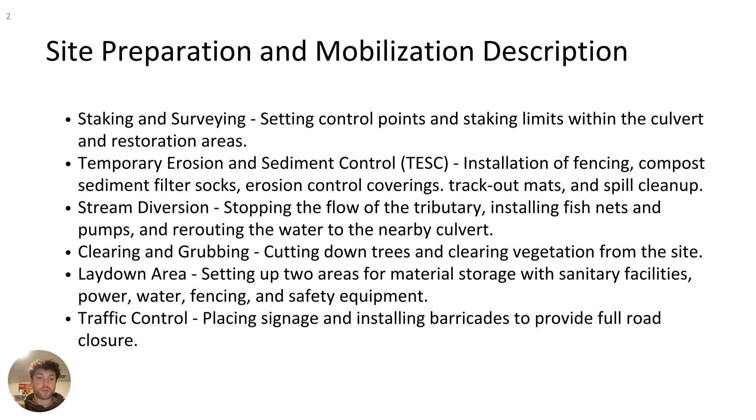We also have the laydown area, which includes setting up 2 areas for material storage with sanitary facilities, power, water, fencing, and safety equipment. Lastly, we have traffic control, which includes placing signage and installing barricades to provide full road closure.

The top safety risk that we presume to be the biggest for our section is getting struck by hazards from traffic or equipment. Workers are exposed to moving vehicles and heavy machinery during road closures, setup, and site clearing. Improper barricade placement or lack of visibility can lead to traffic entering the construction zone.

Another one is slips, trips, and falls, like uneven ground, vegetation debris, and temporary erosion control measures that can create trip hazards throughout the site. Our third one is injury from clearing and grubbing operations, for example chainsaws, chippers, and falling branches pose a risk during removal.

And our last one is chemical leak, as our SPCC spill control for a generator is required, and for other machinery as well, because they are diesel based.

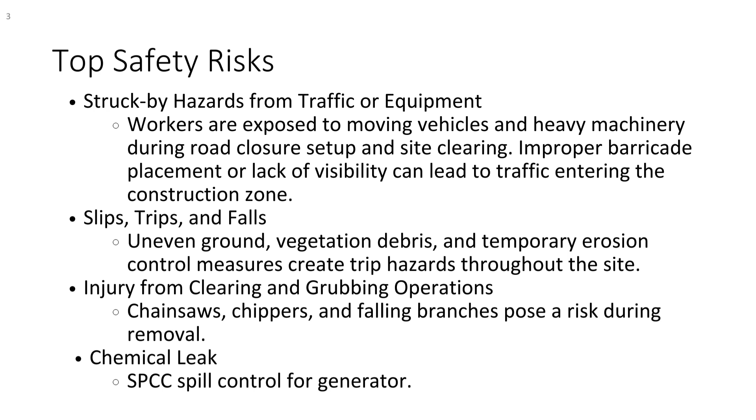Top quality risk: spill prevention for machinery and generator. For the laydown area, we might not be able to get the permissions for the temporary laydown area. WASHDOT must approve the signs and barricades. For the stream diversions, risk of weir failings and water flooding the site.

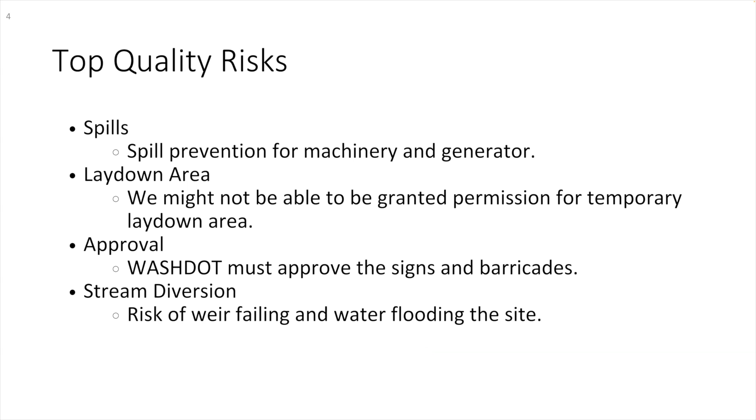Here is our work breakdown structure. We will begin with staking and surveying, which sets the control points and defines the limits for all of the work zones. That's immediately followed by installing the high visibility fencing, our first erosion and sediment control measure.

Once the fencing is in place, we can then move into 2 parallel activities: stream diversion and clearing and grubbing. Stream diversion will reroute the flow of the water, and clearing and grubbing begins the clearing for the site. After the first section is cleared during clearing and grubbing, we can begin temporary erosion and sediment control in tandem.

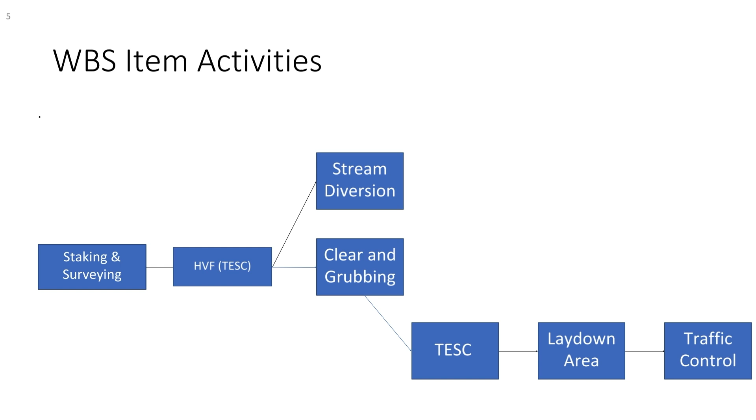Next, the laydown areas will be set up, and finally we will implement traffic control, fully closing the road and posting the detour signage. Our first activity is stake and survey.

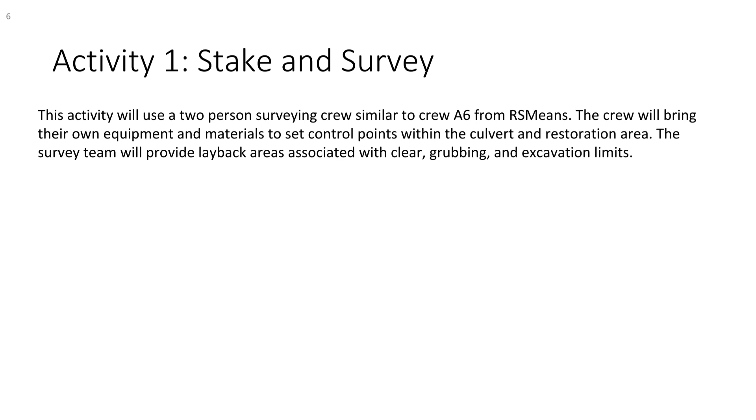This activity will use a 2-person surveying crew similar to the crew A6 from RSMeans. The crew will bring their own equipment and material to set control points within the culvert and restoration area. The survey team will provide layback areas associated with clearing, grubbing, and excavation limits.

For the stake and survey, the crew is a 2-person crew, which includes a chainman and a construction site surveyor. The chainman is an aide to the construction site surveyor, another surveyor that helps the main person.

We don't have any predecessors for stake and survey, as this will be our first activity. It will interact with the high visibility fencing task that comes after setting up control points, as well as clearing and grubbing. Other WBS items that interact with stake and surveying include excavation.

We don't have any inspections and testing and hold points with stake and surveying, and we also don't have any limitation or rules that are specific to this portion of our activities.

As can be seen on the presentation slides, I have drawn up some points for the high vis fencing, as those points will be the stakes that we would be setting up from the survey group.

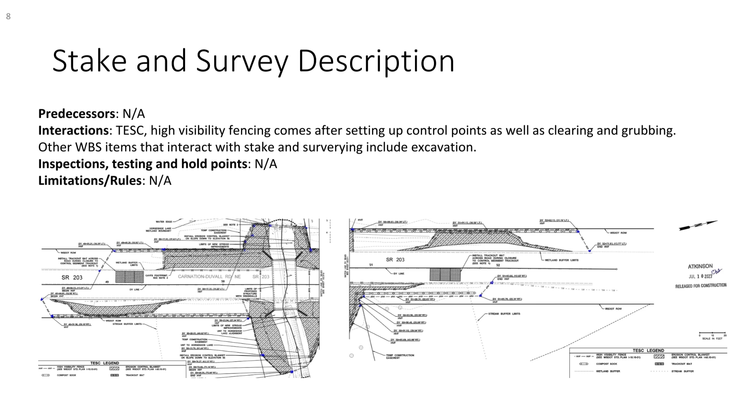They're not specifically going to be at those exact spots; these are just examples of where they can be. Some important points include the beginning of where the fencing will start, some different elevations, as well as the end of the fencing.

Upon completion of staking and surveying, the temporary erosion and sediment control high-vis fencing placement may begin. This activity must be completed prior to all other work on site, and it must be approved for placement and compliance by a certified erosion sediment control lead.

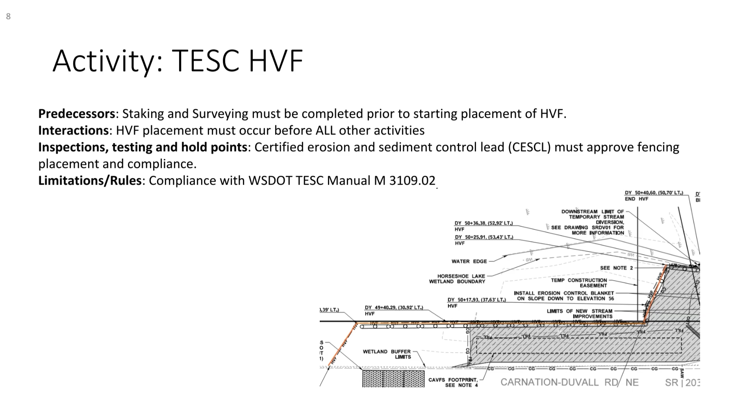The labor requirements are fairly small, requiring only 2 general laborers, as well as 900 linear feet of high visibility fencing roll. The description of the work is also fairly simple, requiring the 2 general laborers to drive fence posts every 10 feet along the perimeter established during staking and surveying while mounting high visibility fencing roll to the fence posts.

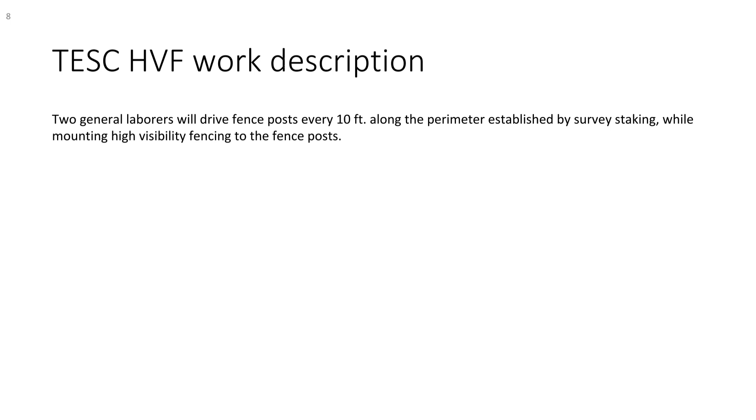The next part of site prep and mobilization is the stream diversion. In order to install the culvert, we have to first dam and redirect the existing stream. To do this, we'll have a team of 2 general laborers as well as 1 excavator operator.

First, a fishnet will be installed upstream of where the dam will be, and then the operator will use the excavator to drive a steel sheet pile into the stream, perpendicular to the flow, to stop the flow. Once the flow is stopped, 1 primary electric pump with a 2-inch diameter and 1 backup diesel pump with a 4-inch diameter will be installed next to the sheet pile.

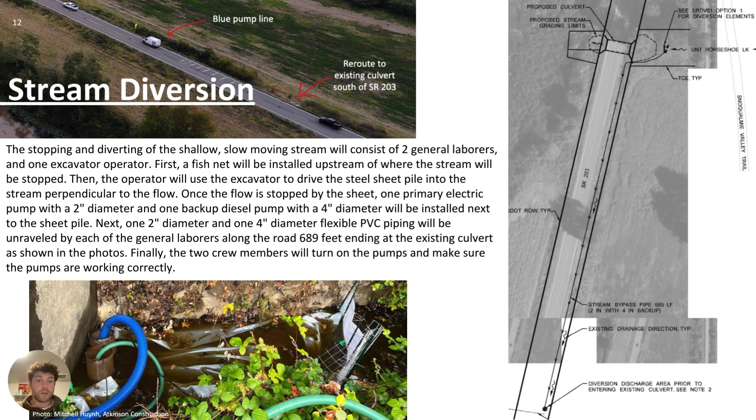Then a 2-inch diameter and a 4-inch diameter flexible PVC pipe will be unraveled by each of the general laborers along the road, 689 linear feet, ending at the existing culvert, as you can see in the photo above and to the right. Finally, the crew members will turn on the pumps and make sure they are working correctly.

So this activity, as I said before, consists of 2 general laborers and an excavator operator, using an excavator that will already be on site, 2 types of PVC pipe, 2 pumps, a steel sheet pile, and a fishnet. For productivity, the laborers will be walking about 1 mile per hour while unraveling the pipe.

The total time is estimated to be 15 minutes to install the weir and the pumps, and then another 15 minutes to unravel the pipes, totaling a half hour.

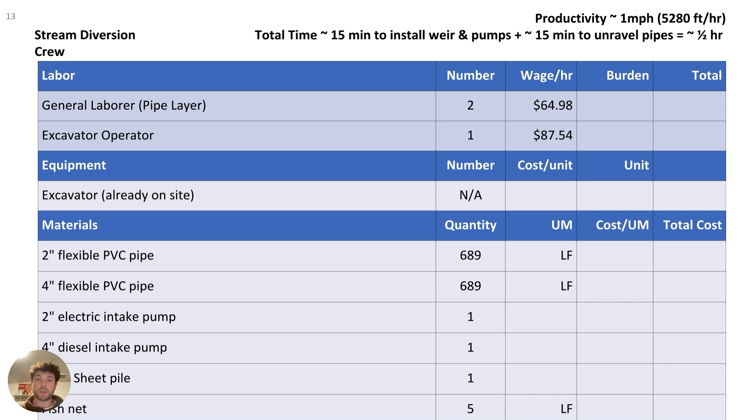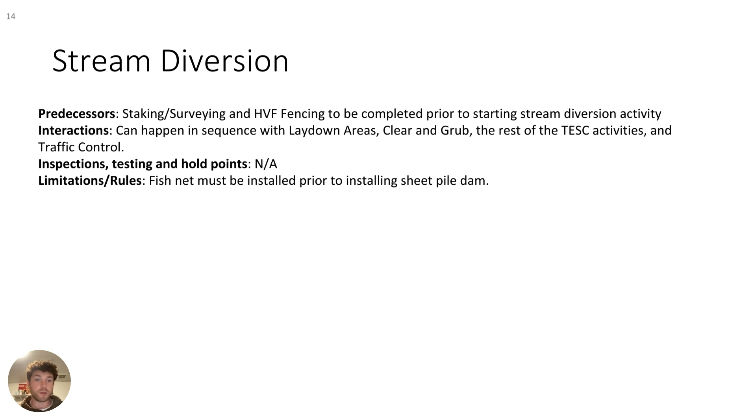For the stream diversion, staking and surveying, as well as the high-vis fencing, will have to be completed. Stream diversion can happen in sequence with the laydown areas, clear and grub, and the rest of the TESC activities, as well as traffic control. A big rule for limitations is that the fishnet must be installed prior to installing the dam in order to protect the fish.

In this task, we divide into 3 small tasks. Task 1 is earthwork — this activity just ensures that there's an accessible roadway connecting SR203 and the construction sites. Task 2 is SPCC, which is erosion control for the potential risk of fuel leaks, like diesel or petroleum, during construction.

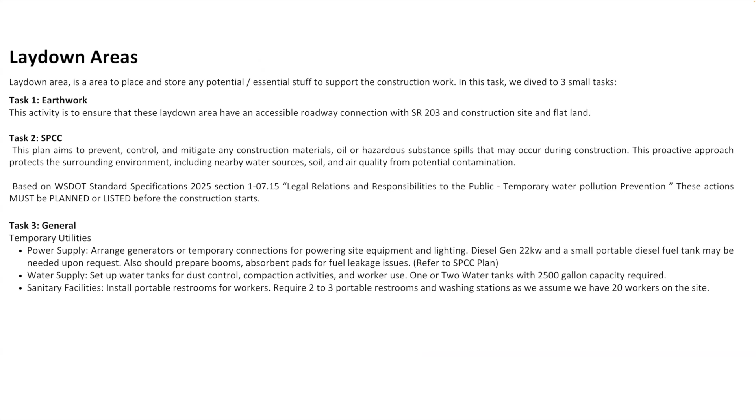Task 3 is general, or you can consider it temporary utilities. In this task, we need to ensure there's a power supply, water supply, and some portable toilets for workers and the construction activities.

So these are our laydown areas — we have 2 laydown areas, one on the north and one on the south. Those 2 laydown areas have similar areas, and there's a certain amount of gravel covering the roadway surface.

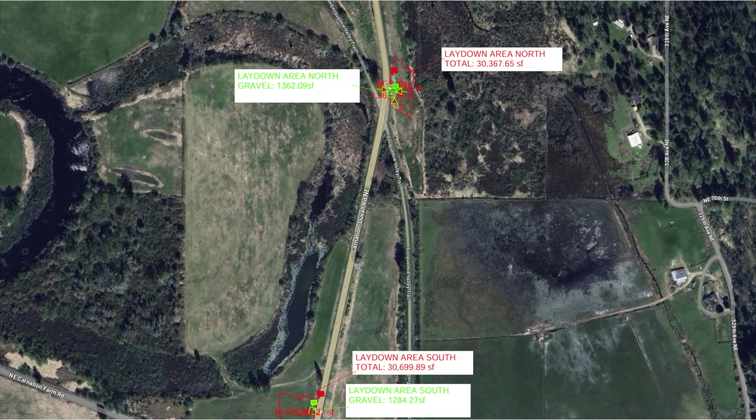For the first task, earthwork, we need to ensure there's gravel on the floor so we can have temporary road structures for trucks to drive into the laydown areas. For these 2 laydown areas, we estimate up to 2 hours to finish these tasks.

Work duration will be 30 minutes per laydown area plus 30 minutes for equipment transfer time. So we need 3 equipment operators and 1 labor foreman, and this is all the equipment that we need, and the materials ordered.

So we need 300 square yards of gravel for 2 laydown areas.

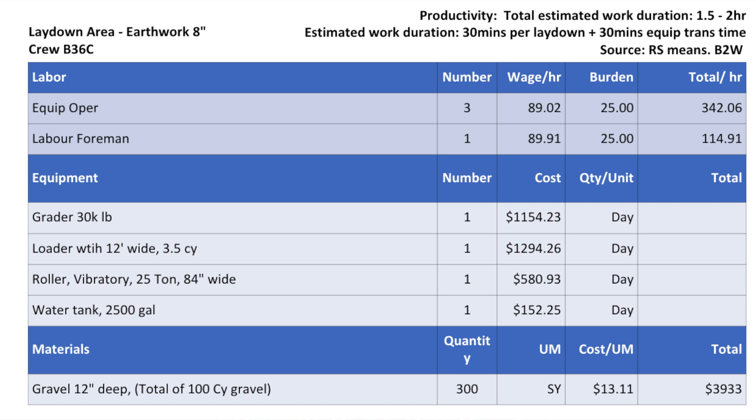So for the second one, SPCC. We just need to place 2 or up to 4 spill kits on the construction site, 2 on each area: 1 north, 1 south, and the remaining 2 on the construction area.

And the last one, general, or you can consider it the utilities. We just have to ensure there's power supply, water supply, and toilets or restrooms for the workers to use. So we have 6 generators with lighting, 1 portable toilet, and 1 portable sink. This is the end of the laydown area part.

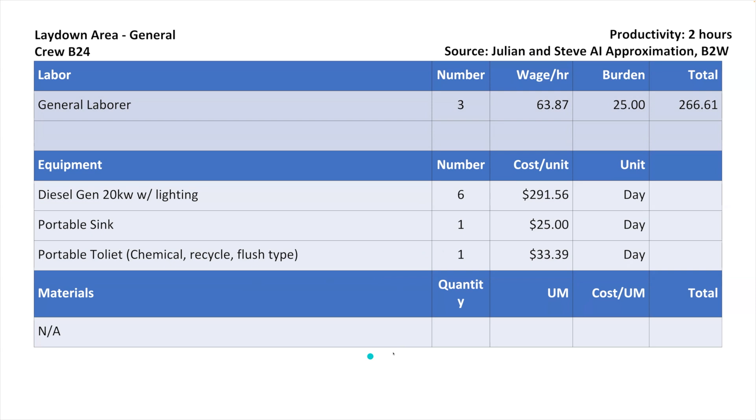The next activity is clear and grub. The only required predecessors for this activity are staking and surveying, as well as high visibility fencing placement. Because clear and grub must occur in 2 segments, one on each side of the road, once one segment has been completed, work may continue in tandem with TESC.

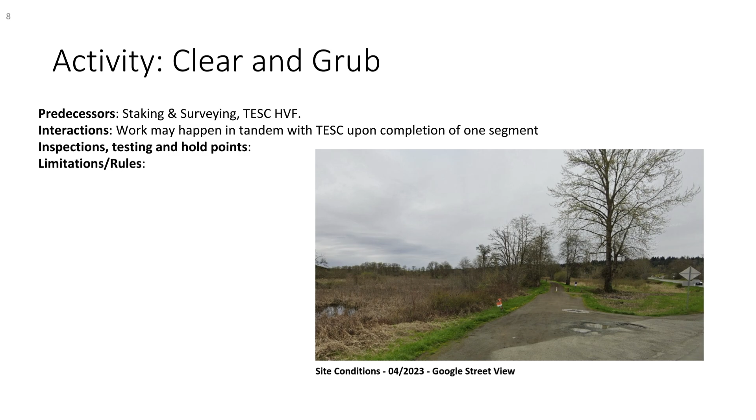Labor requirements are higher than most of our others have been, requiring 4 general laborers, as well as 2 equipment operators and 2 heavy truck operators. This is to operate the small 1.5 cubic yard hydraulic excavator, as well as the 3 cubic yard crawler loader, and 2 dump trucks.

The worksite is on farmland, meaning there will be fewer trees than a typical site, making our job a little easier. The trees and logs on site will be cut down and removed, then loaded into a chipper along with their stumps.

After any trees that must be removed have been removed, the crawler with a blade attachment will remove any other excess vegetation and then consolidate it to be loaded into the dump trucks.

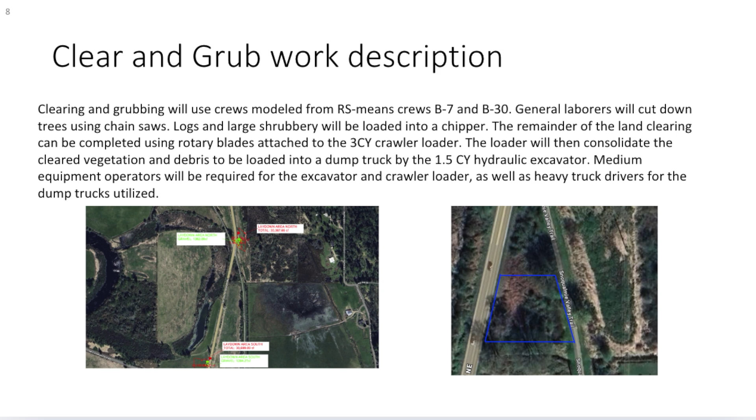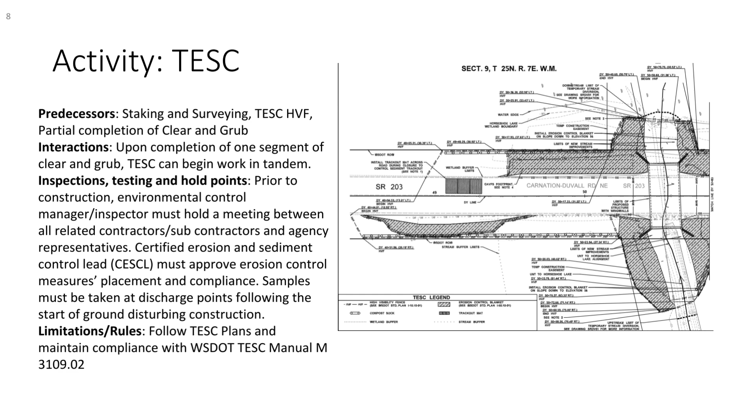Following the completion of one segment of clear and grub, work can begin on TESC, or Temporary Erosion and Sediment Control. However, prior to any work beginning, a meeting between the environmental control manager or inspector and relevant contractors and subcontractors must be held. An additional hold point for this activity is that there must be at least one discharge sample taken and tested during the duration of construction.

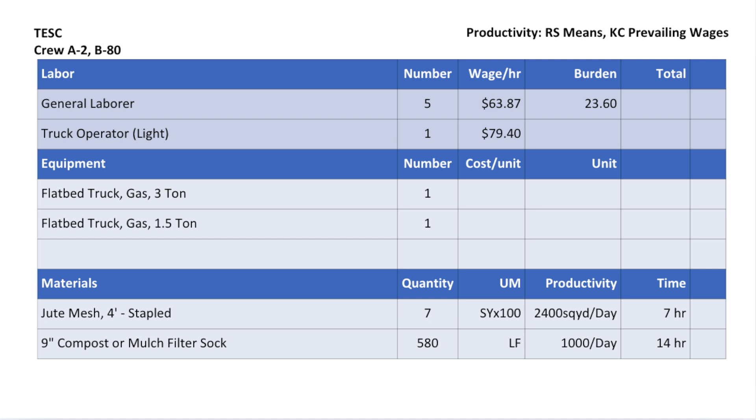The labor and equipment requirements for TESC are 5 general laborers, 1 truck operator, as well as 700 square yards of jute mesh and 580 linear feet of compost sock filters.

Around the borders of the site, the sediment filter socks will be placed and allow water to flow through, trapping out any undesirable sediment or particles. Additionally, as an erosion control measure, placement of jute mesh erosion blankets will be completed. Throughout the duration of the project, the TESC will include spill cleanup and following the SPCC plan.

All erosion control measures must be approved by the CESCL.

Our final activity is traffic control, where we'll be closing the road completely to allow safe access for construction. Then 7 days before the closure, we'll place portable message boards to notify drivers and the public.

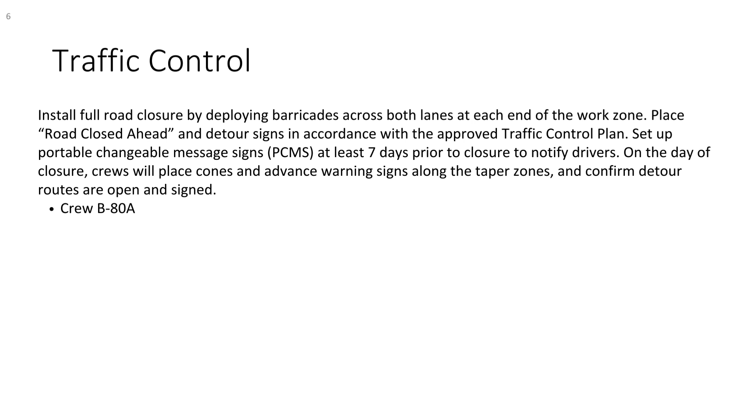Then on the day of closure, our crew will install Type 3 barricades across both ends of the site, placing cones and advanced warning signs along the taper zones, and then check that all the detour routes are clearly signed and open.

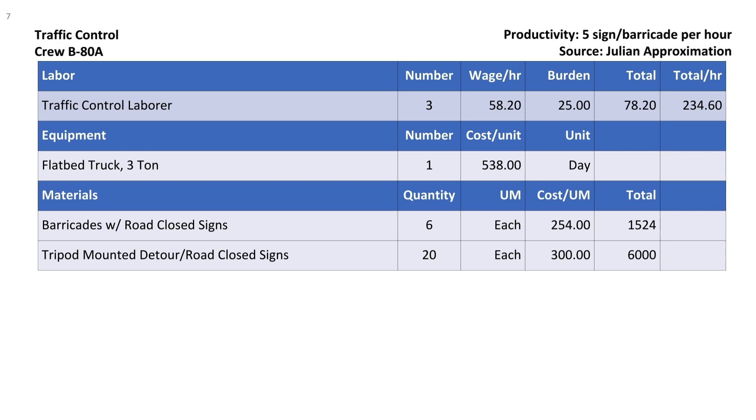Our task will be completed by a crew of 3 traffic control laborers using a flatbed truck. We'll be installing 6 barricades with road closed signs, along with 20 tripod-mounted detour signs. We have estimated a productivity rate of 5 signs or barricades per hour.

Traffic control can't begin until the laydown areas are finished and all the materials are on site.